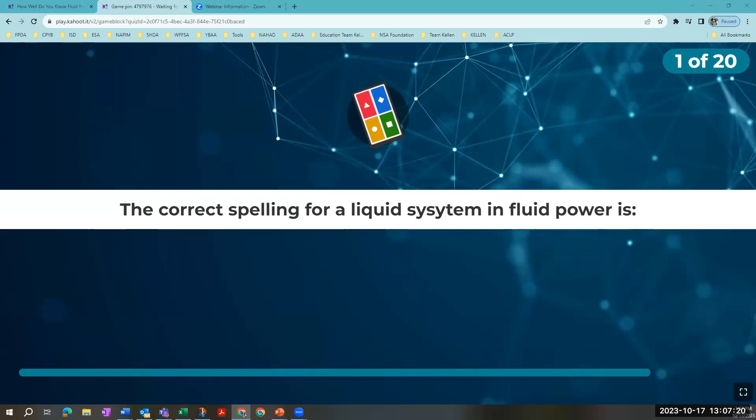Dan, you can feel free to read the question or they can read it themselves, but we've got about 15 seconds left. So yeah, all of these spellings, and probably 2 or 3 more, are the spellings that we see for this word, and it never ceases to amaze me how we still find new spellings on occasion.

All right, so hydraulics is spelled with an A-U and not a W. If it is spelled with an O, that is water power, by the way, but I didn't put that one on there because it would actually be 2 answers. It would be hydraulics and hydraulics with an O. So anyway, next question.

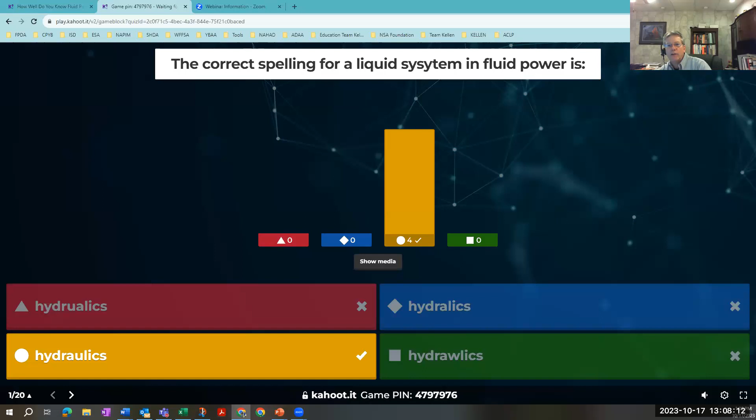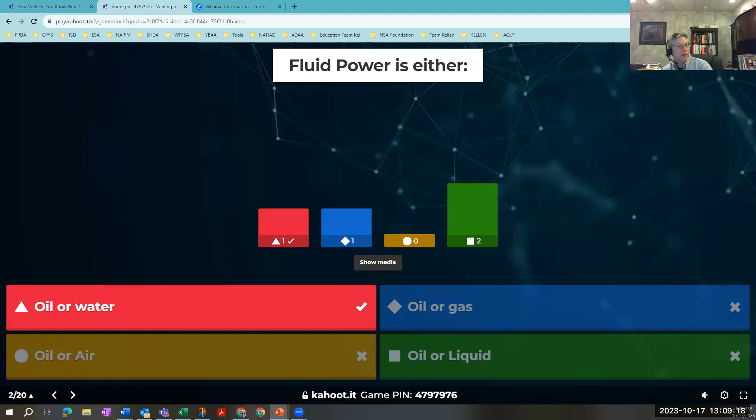Fluid power is either oil or water, oil or gas, oil or air, oil or liquid. There are 2 basic entities that go in the fluid power column. So the answer is that it is oil or gas. Water is a liquid, oil is a liquid, fluid, and liquids are fluid, and a gas is a fluid. So that was a little bit tricky, but understand fluid power includes hydraulics and pneumatics.

Hydraulic pressure in the United States is in GPM, takes into consideration that we are north of the equator, is multiplied by 14.7 due to atmospheric pressure, or is measured in PSI?

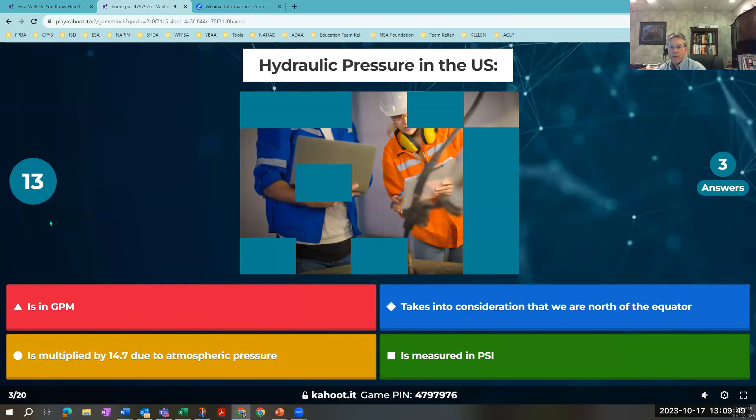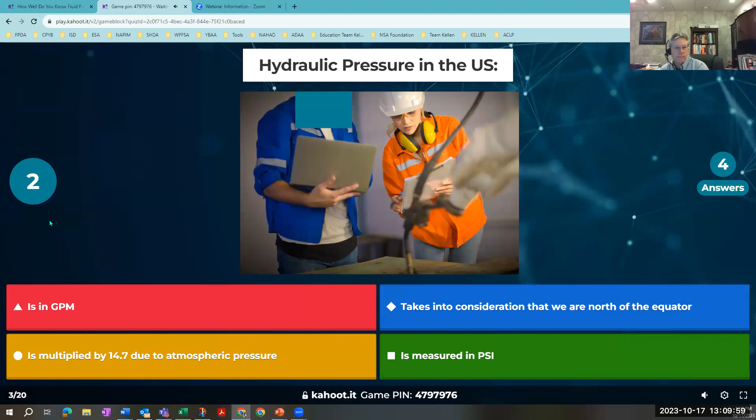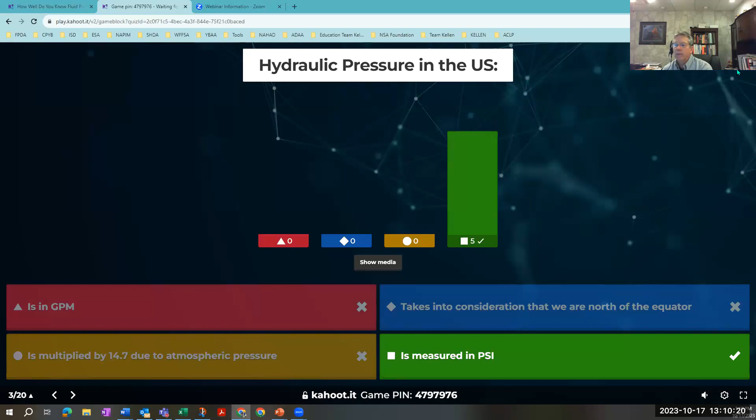Ah, look at that, everybody's got it. So that is correct, GPM is a measure of flow. PSI is pounds per square inch, the amount of pressure that is against 1 square inch of surface area. And it is not 14.7, which could be in a later question. Next.

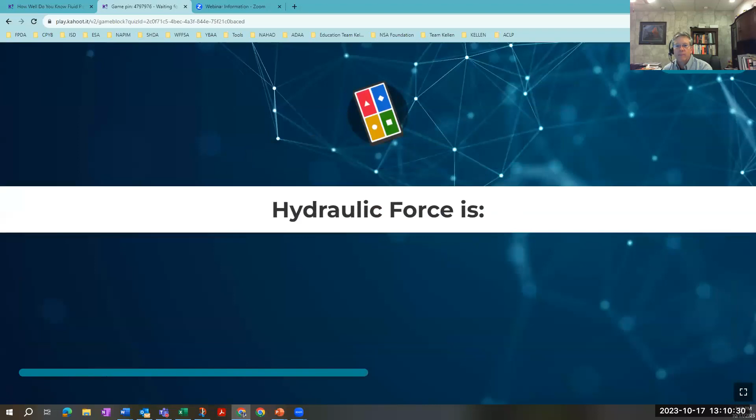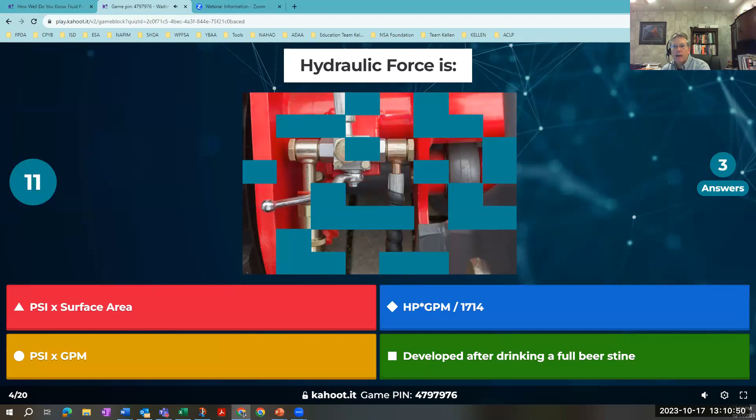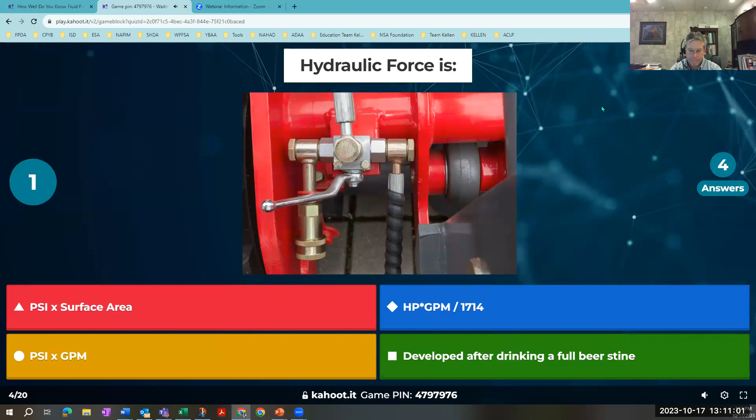Look at Jerry going to the top. Hydraulic force is PSI times surface area, HP which is horsepower times GPM divided by 1714, PSI times GPM, or developed after drinking a full beer stein. PSI times surface area would be the answer to that. That is pounds per square inch multiplied by the square inches that pressure is acting on. That gives us our force. Force is equal to PSI times area. Next.

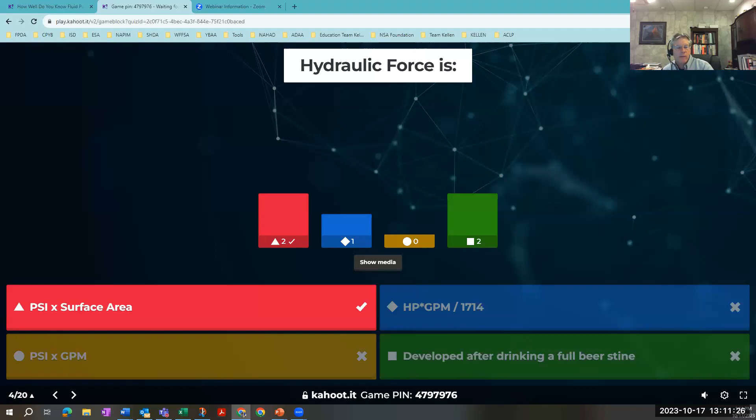Pascal's law, which is a big deal for fluid power, says that crap flows downhill, pressure is inverse to horsepower, pressure is 90 degrees to all surfaces of a container, or both B and C.

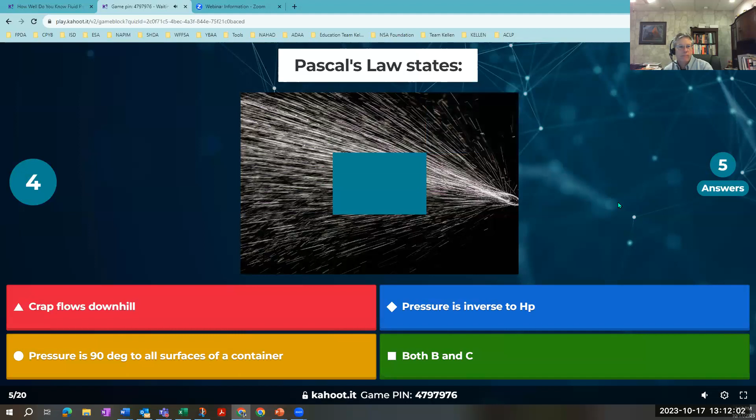Pressure is 90 degrees to all surfaces of a container. If that container has a static condition and does not have any dynamic flow in it, the pressure will be equal and at 90 degrees to all surfaces. I don't know if Pascal was a plumber or not, so I don't know if he invented the idea that stuff flows downhill, or whether that was somebody else.

Next. Oh, look at that, the lead has changed. I guess I've got to play a little bit if I even want to get on the board, huh?

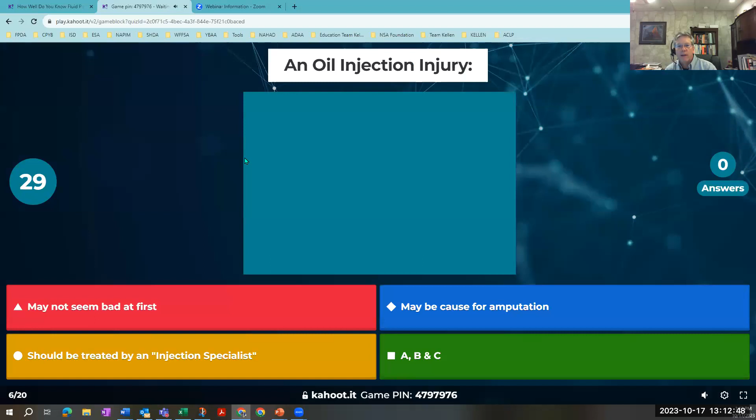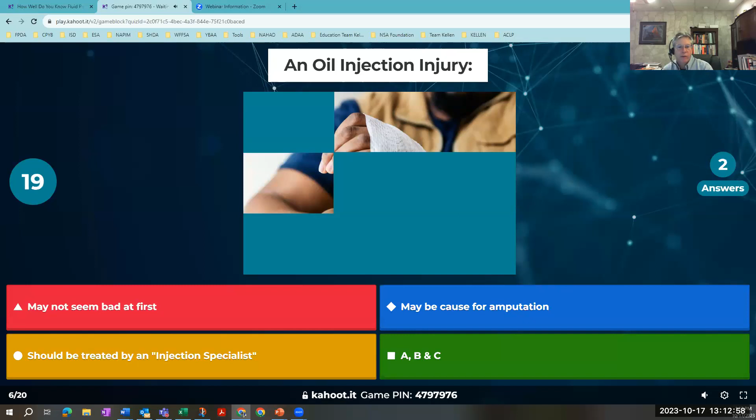Okay, a safety question here. An oil injection injury may not seem bad at first, may be cause for amputation, should be treated by an injection specialist, or all of the above.

Dan, you should pick your favorite color since you know all the answers. Boy, I wish I had purple on there. Actually, green. Ah, too late, I already missed it.

So the answer would be all of those. Oil injection injuries should be taken very seriously. It may just look like a pinhole prick, but most likely you'll also see some swelling in that area from the oil that went in. You can get an injury like this from grease or paint — never rub your finger against a paint sprayer to see if it's clogged. Any time you put your skin up against a pressure nozzle of more than about 100 PSI, you are risking injecting something into your body. Even high pressure compressed air and pressure washers fall into this category.

Whenever you get oil or some type of petroleum-based product injected under your skin, it begins to eat your flesh, and sometimes it needs to be amputated, but most of the time they'll at least fillet you open and let the oil get out of your body instead of letting it work its way up through your finger, hand, and arm. In one class, as I was teaching about that, a guy raised his hand, and he was missing a finger on that hand — he had lost it due to an injection injury. So these injuries are to be taken seriously, and you've got to go to a specialist who understands that.

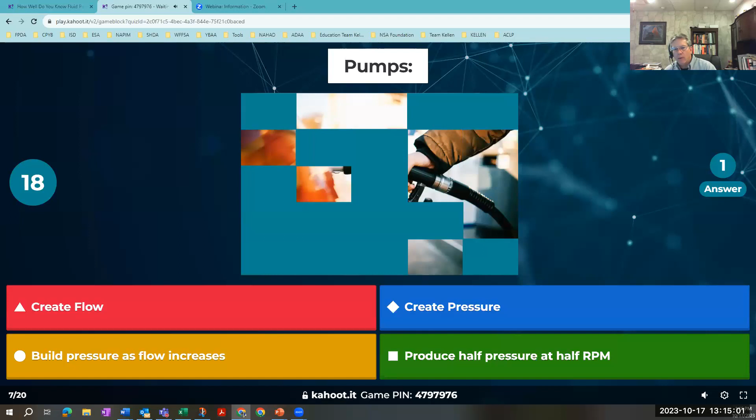Next question. Pumps: do they either create flow, or create pressure, or build pressure as the flow increases, or produce half the pressure at half the RPM? Well, what do pumps do?

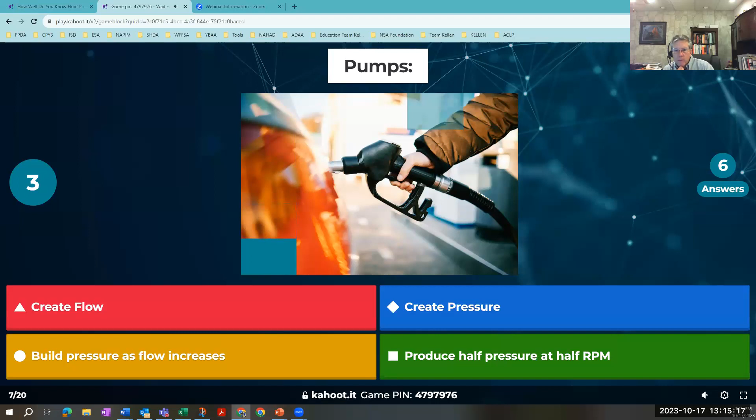Pumps create flow. Pressure is built whenever flow encounters a restriction and starts to build back pressure. A pump is always going to be rated at a certain gallon per minute or liter per minute rating, and then it will also have an upper pressure rating. So the pump produces the flow, and it's up to your system to create the pressure on that pump, and the pump is rated to be able to withstand that pressure rating. So that was good. Next question.

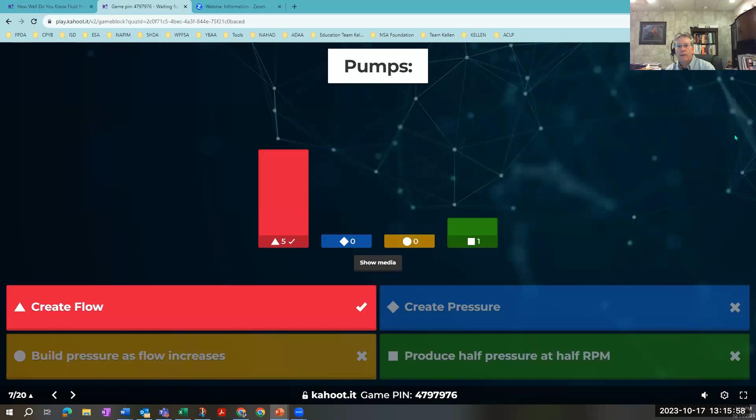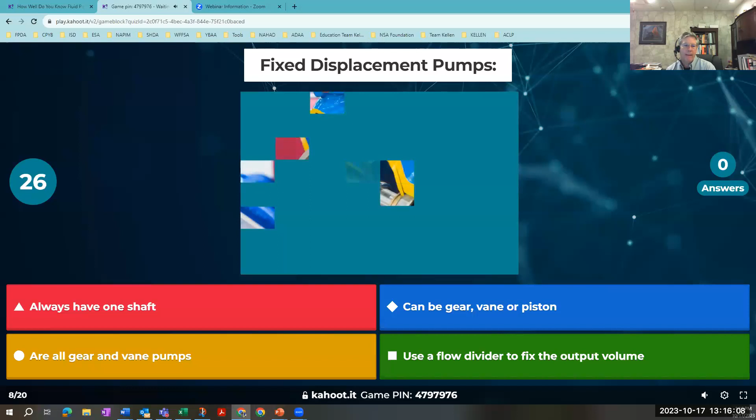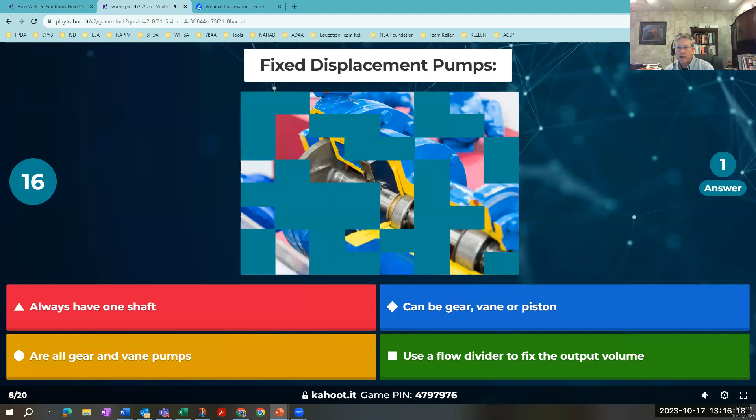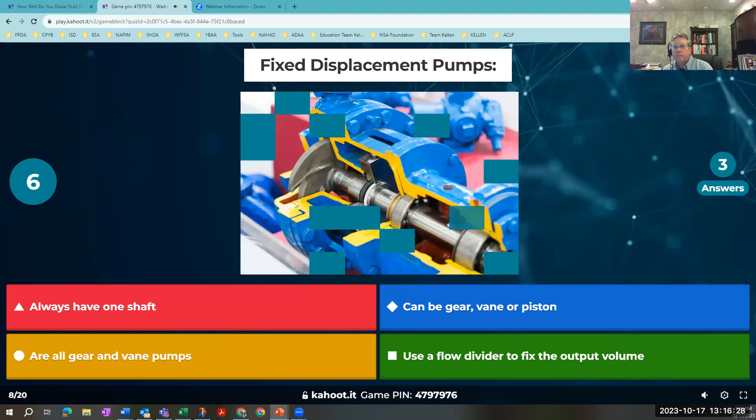So that is correct, except for the two people who said 'all gear and vane pumps,' because vane pumps can have a variable volume design with a pressure compensator on it. The way they work is the ring actually gets pushed to be centered over the rotor, so there's equal volume on both sides of the gap between the rotor and the ring. A common manufacturer for variable volume vane pumps is Continental. Next.

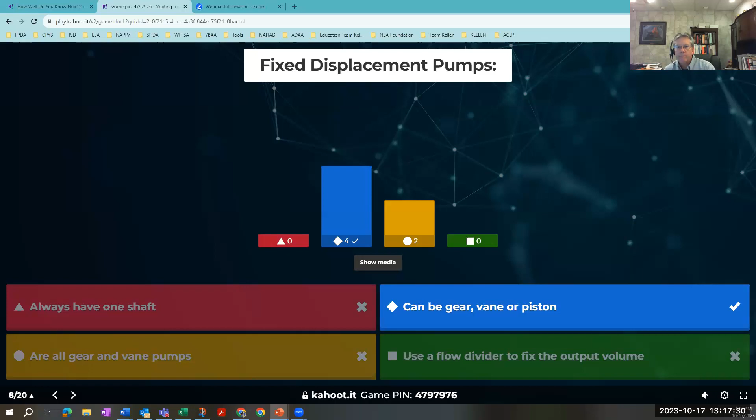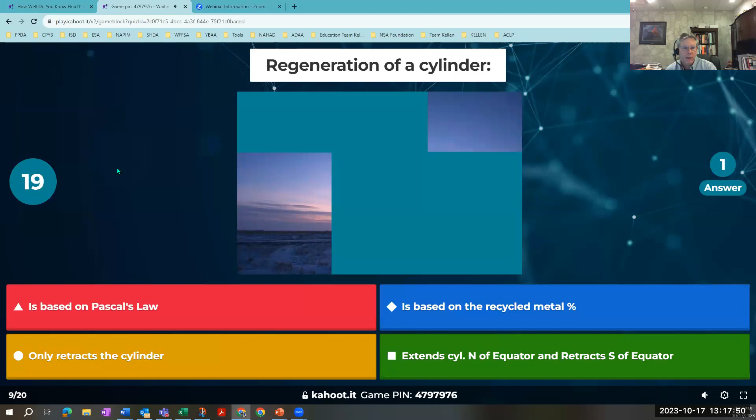Regeneration of a cylinder, often referred to as regen, is based on Pascal's law, is based on the recycled metal percentage in that cylinder, only retracts the cylinder, or regen extends the cylinder north of the equator and retracts south of the equator.

The answer is that it's based on Pascal's law, because pressure is equal against all surfaces in a closed container. Whenever you're doing regen in a cylinder, you're basically opening up the back end of the cylinder to the rod end of the cylinder, putting equal pressure on both sides, which then creates a differential force based on the surface area of the piston — the back of the piston versus the front, which is like a donut shape, because the rod takes away some of that area.

The cylinder will extend if you connect the extension and retraction ports together, because the pressure is going to basically be equal within all ports, but the force is not equal, because the surface area is not the same — the rod takes up some surface area on the rod end of the piston. So regen is a pretty cool thing, and many systems will use that to conserve energy. Next.

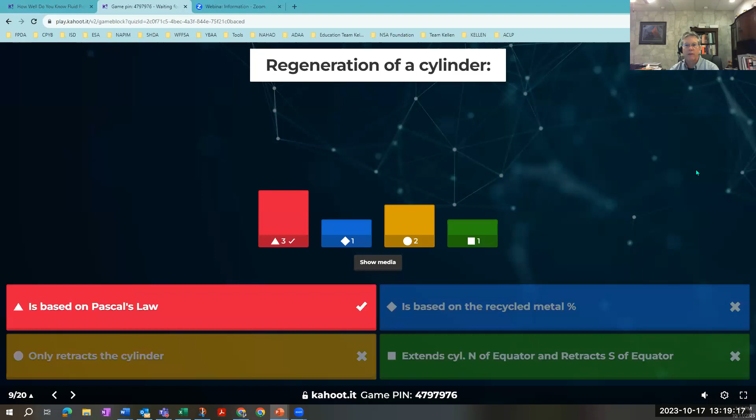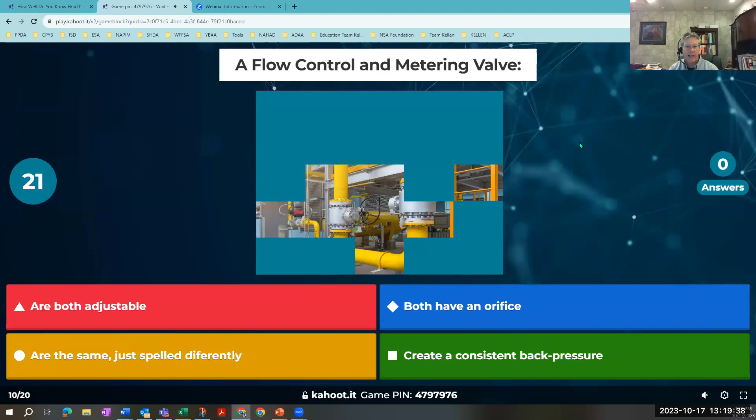A flow control and a metering valve: are both adjustable, both have an orifice, are they the same just spelled differently, or do they create a consistent back pressure?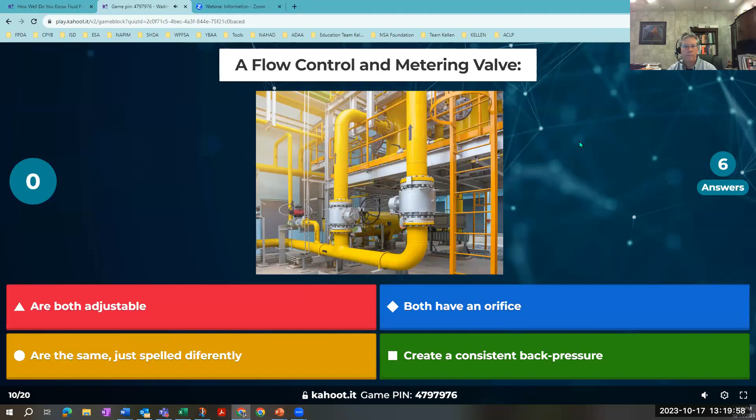Realistically, the difference between what we call a flow control and a metering valve is that a flow control will have a bypass check, so it only meters in one direction. So they aren't the same device. They aren't always adjustable—there are many that have adjustability, but you can get a flow control or a metering valve that's just set by the factory. The answer is that they do both have an orifice, and that orifice is what meters the flow, going on a metering valve both directions, or on a flow control in only one direction.

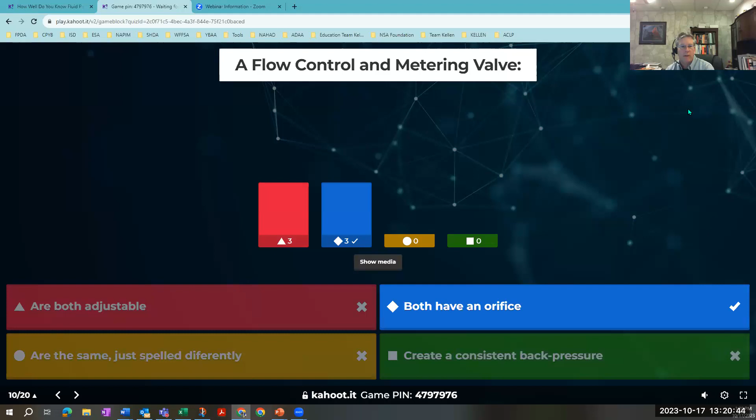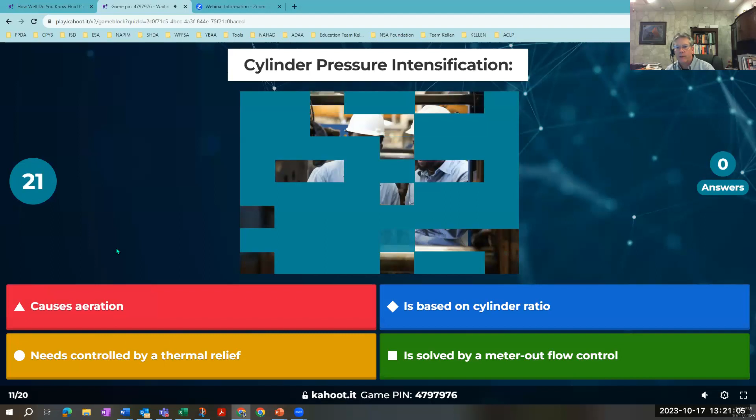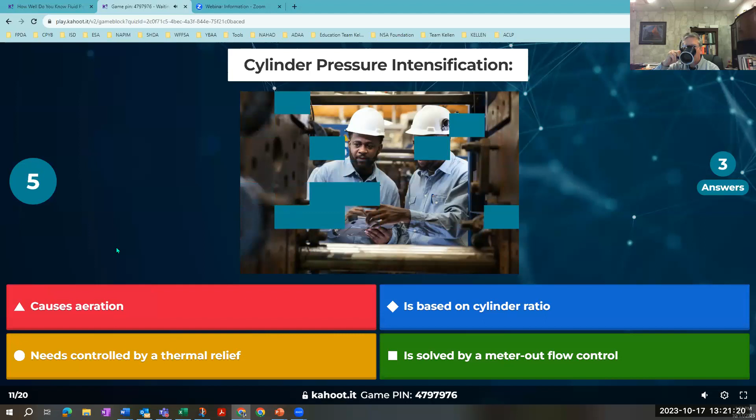Cylinder pressure intensification causes aeration, is based on the cylinder ratio, needs controlled by a thermal relief, is solved by a meter-out flow control. So the answer is going to be: it is based on the cylinder ratio.

The cylinder ratio is the surface area of the blind end of the piston versus the size of the rod. A lot of times we have a 2-to-1 ratio, where the blind end of the cylinder has an area twice the size of the rod. If you go to a 3-to-1 ratio, you have a bigger rod. The annular area, which is the area of the piston outside of the rod on the rod end, would be 1/3 of the blind end piston area on a 3-to-1.

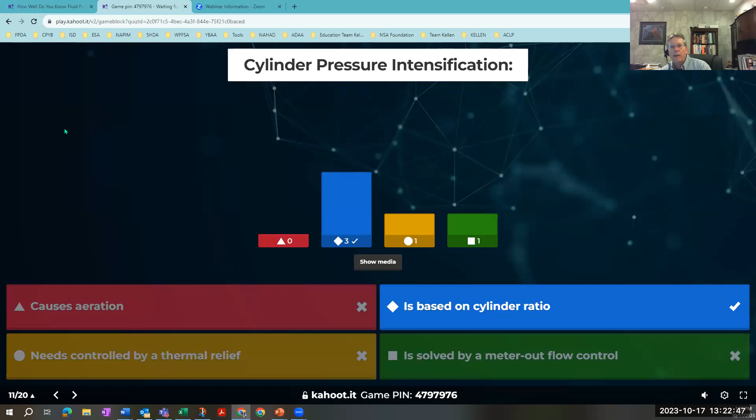You can get intensification by putting pressure in the back of a cylinder and restricting the flow coming out the rod end. On a 2-to-1, you can get double the pressure in the front compared to what you're putting in the back. On a 3-to-1 cylinder, if you put in 2,000 PSI in the blind end, you could get 6,000 PSI on the rod end. So that is intensification based on the cylinder ratio.

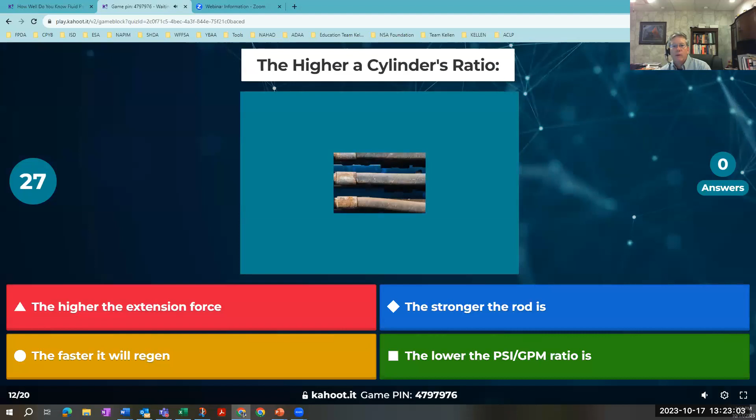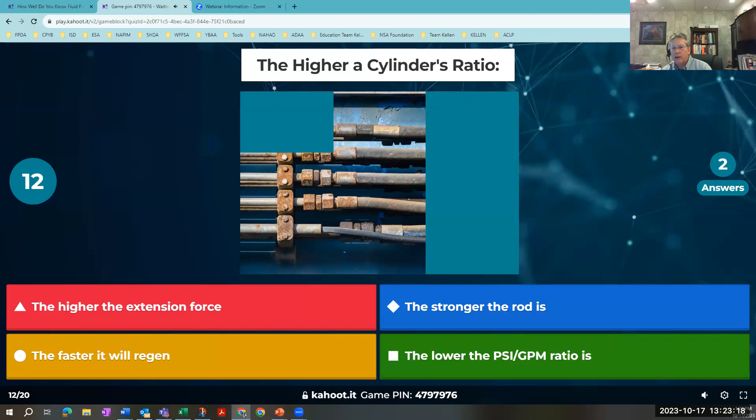This one's kind of similar to the other question. The higher a cylinder's ratio, the higher the extension force, the stronger the rod is, the faster it will regen, or the lower the PSI per GPM ratio is.

We just kind of answered that on the last one. Whenever I said like a 3-to-1 ratio, we'll have a larger rod. So the higher the ratio means that the rod is getting stronger. A 3-to-1 ratio would be a larger rod than a 2-to-1 ratio, that ratio being basically the blind end of the piston area to the annular area around the rod. It does not give you a higher extension force. It would actually, if the ratio goes up, the regen will be slower because there's less oil around that rod to go back into the blind end. And the lower PSI per gallon per minute ratio is basically a made up term. So there you go—stronger the rod is.

Wow, I think Vanna had all the answers.

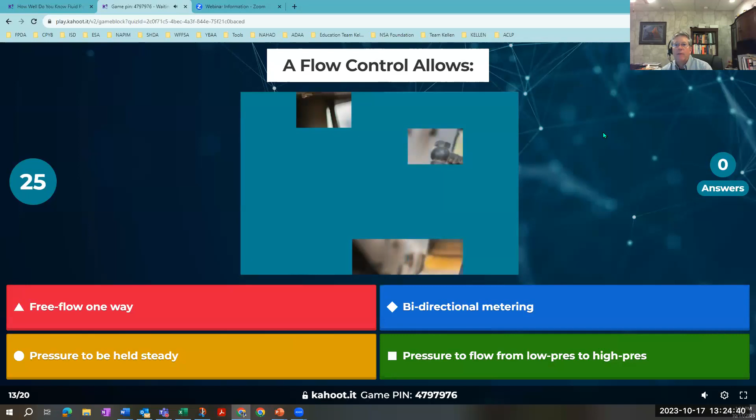A flow control allows free flow one way, bidirectional metering, pressure to be held steady, or pressure to flow from low pressure to high pressure.

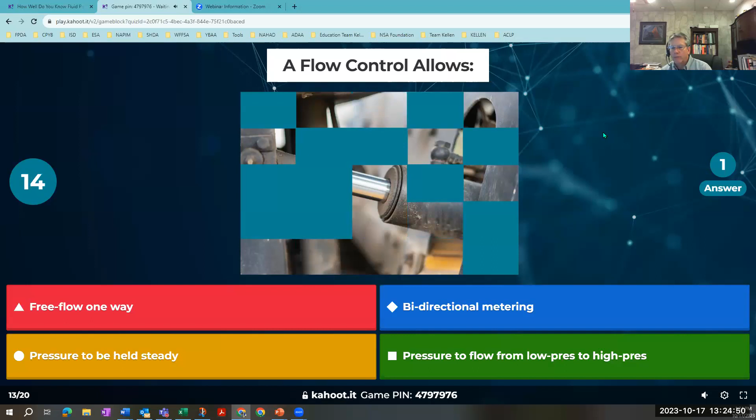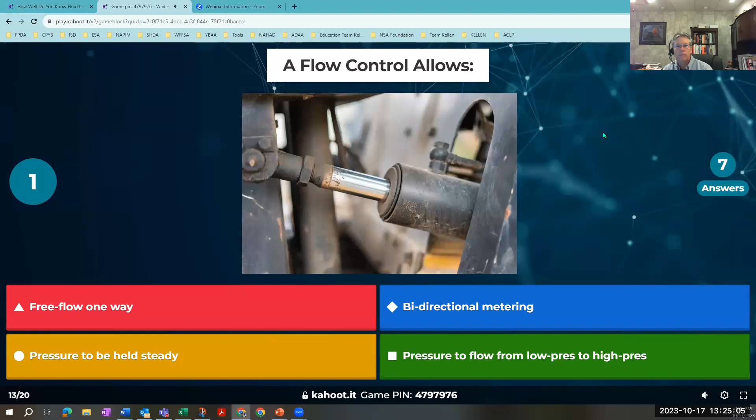So yes, I basically just answered that back on the question about the difference between metering valves and flow controls. A flow control will allow free flow in one direction—it's a metering valve with a bypass check valve. The bidirectional metering would be a metering valve that's going to meter in both directions. The other two answers had pressure in them, and a flow control is a flow device, not a pressure device. So even though it can affect pressure, it's not going to hold it steady, and pressure never flows from low pressure to high pressure—it's always going from a high pressure to a low pressure.

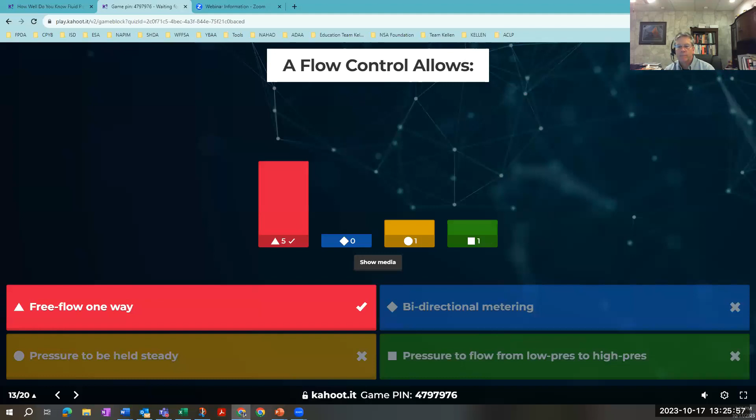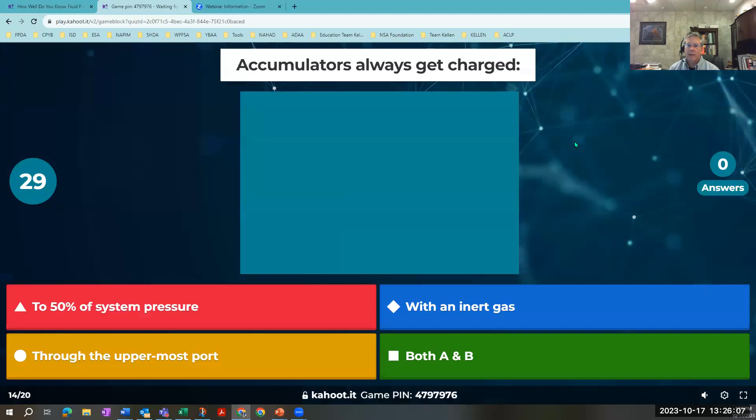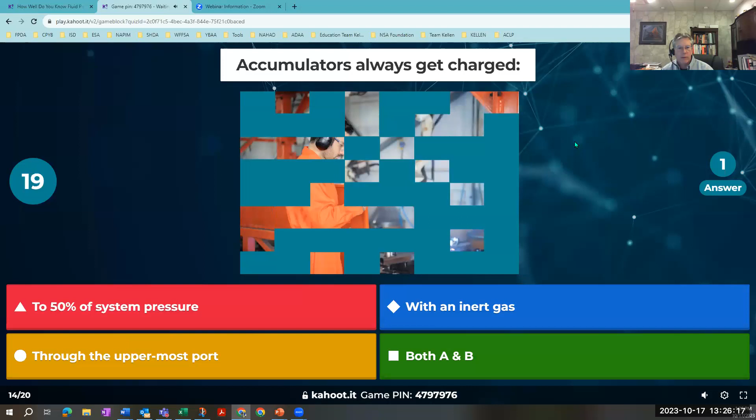Accumulators always get charged to 50% of the system pressure with an inert gas through the uppermost port, or both A and B.

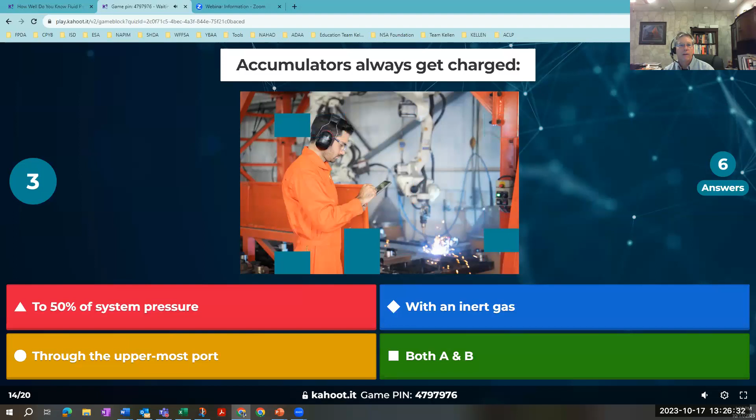The answer is going to be an inert gas. The reason it's not A and B is that there are times you'll put more pre-charge pressure in an accumulator if you're looking to take a surge out of the working port, or something like that. A lot of times, if you're using oil as an emergency backup supply of fluid, you might charge to 50% of system pressure, but that's not always true across every application. You need to use an inert gas, never compressed air or any other gas that has combustibility or will support combustion.

There are cases where people have used compressed air, and whatever that gas is, once compressed, there's some oil vapor in there as well as an atmosphere that will support combustion. They can diesel and they can explode. So an inert gas will prevent that and make working with accumulators much safer.

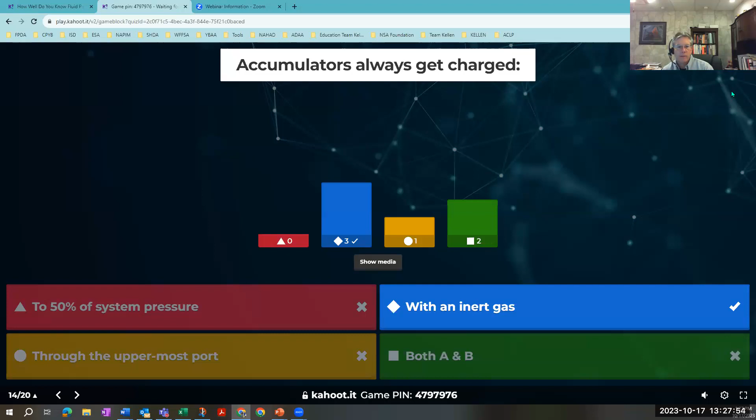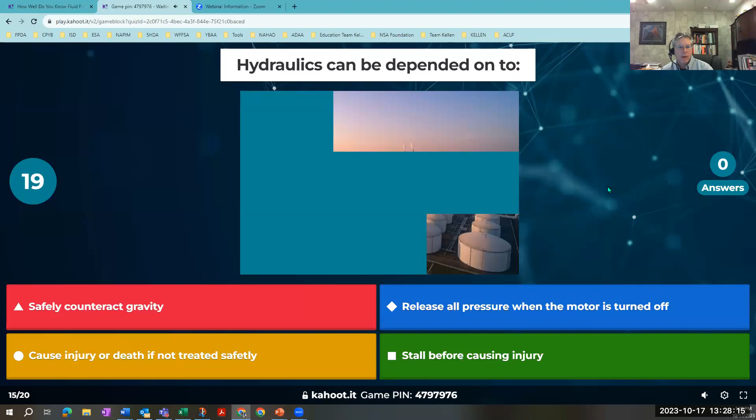Hydraulics can be depended on to safely counteract gravity, release all pressure when the motor or engine is turned off, cause injury or death if not treated safely, or stall before causing injury.

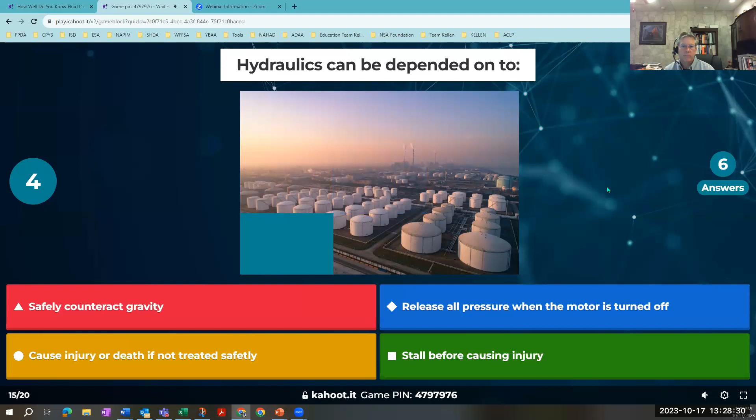Correct. As a matter of fact, thinking that hydraulics will safely counteract gravity can lead to death. So you've got to respect the hydraulics. You should never trust the hydraulics to be holding a load. Hydraulics do fail. You should always mechanically support that load.

Like for instance, when you're using a jack under a vehicle, that's a hydraulic jack. You're going to use jack stands, so you're mechanically supporting that load before you actually crawl underneath the vehicle.

I unfortunately years ago checked out a small dump truck where a guy raised the bed up. He was wiring up his exhaust muffler because he found it easier to just lean over the frame of the truck while doing that. Unfortunately, the bed of the truck drifted down on him and killed him, and I went there to give a report on what would have happened.

Whenever I raised the truck up and put the safety leg in, like he should have done, there was his chewing gum still with teeth marks on the muffler. It's pretty sad to think this guy had no clue how unsafe what he was doing was.

So you've got to think. I often say, think 3 seconds ahead whenever you're working with things, because we don't have a 3-second rewind button. But if we can just think 3 seconds ahead, we would think, hey, I'm not going to bend in here. I'm going to walk around to the other side and put that safety leg down.

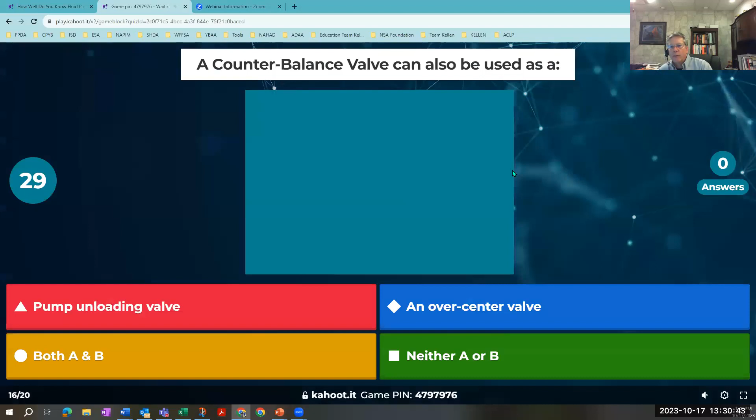Counterbalance valve can also be used as a pump unloading valve, an over center valve, both A and B, or neither A or B.

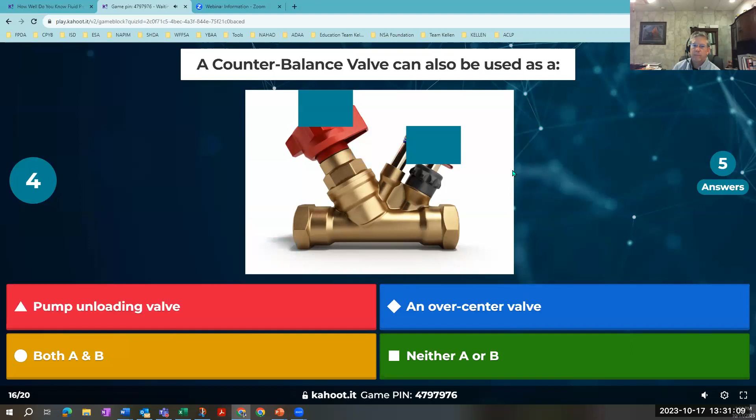This is a pretty tricky question. The answer is going to be a pump unloading valve. A counterbalance valve is a load holding valve, but it's also called a variety of terms based on where it is in a circuit. So it can be a counterbalance valve, generally whenever it's on the blind end of a cylinder holding a load up.

If that load is going to go over center, like on bucket trucks, sometimes on an aerial man lift, whenever the boom goes over center, to keep that cylinder from running away, we use a counterbalance valve, and we often term that an over center valve. We will also use them on motors and call those brake valves.

And since it's pilot operated, we can use a counterbalance valve to unload a pump, especially in a high-low pump circuit, so that the high flow pump gets unloaded with zero pressure against it, because it's being piloted from the high pressure side, which would have the low volume pump. So yeah, counterbalance valve is a load holding valve.

The other valve in the category of load holding would be a pilot operated check. I don't think there's a question in here that keeps me from saying that, but a PO check valve is more of a digital device, either open or closed, and a counterbalance valve is more of an analog valve, which allows feathering to keep the load from running away.

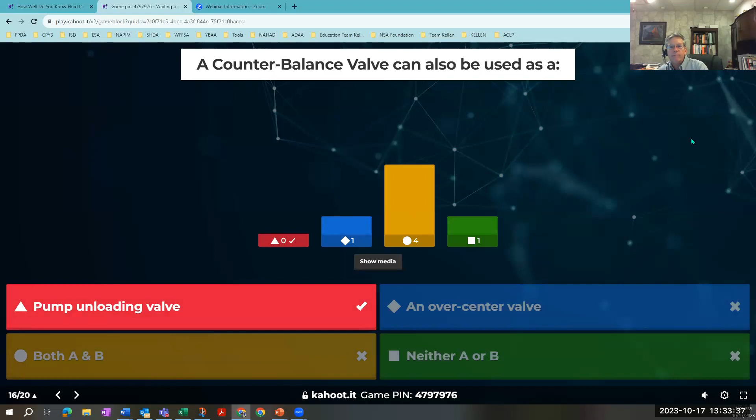Because I'm not sure if I messed that up. So yeah, I don't know that we can correct that, but I really wasn't watching the answers here, but the answer would be the number 4 there, where 4 people got it right. It is both pump unloading and over center. So if it's that close of a score at the end here, we'll have to look at that question. Sorry, I don't know if I messed that up or not. I probably did.

Replacing a gear pump with a variable volume pump is a great idea, is too expensive, requires a pressure filter, or requires back pressure for proper operation.

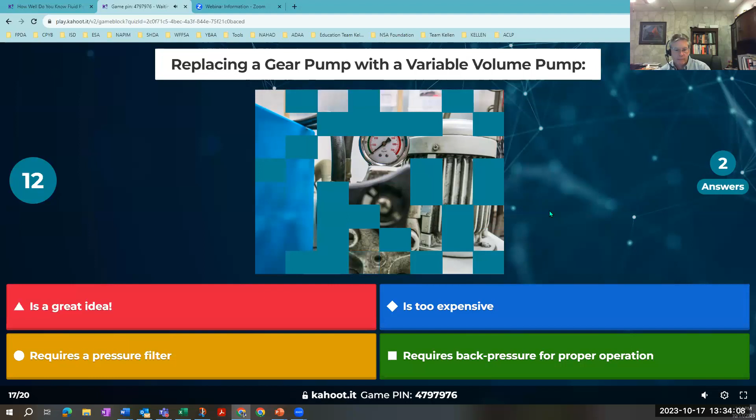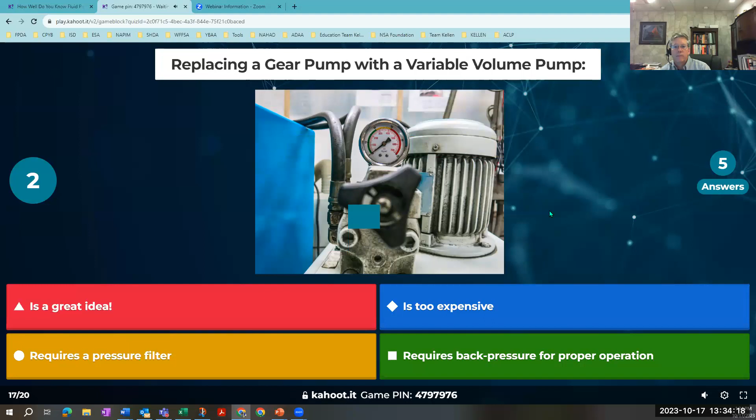Okay, of interest, I realize I didn't frame the question quite right, and this is the first time I've done this. The question should be replacing a gear pump with a variable volume piston pump. If you use a variable volume piston pump, you need to have a certain amount of back pressure, maybe 250 to 300 psi minimum pressure.

That helps lubricate the shoes on the end of the pistons. The pistons have a hole drilled down through them, as do the shoes, and that allows the higher pressure oil to get down there and lubricate between the shoes and the swash plate. So you can't just use a variable volume piston pump and let it go back to tank like you would with a gear pump.

However, it can be a great idea, but you would also need to change the valve, because a gear pump is normally an open center valve going back to tank. You would want to put in a closed center valve so that you're not flowing right back to tank, so you do get that back pressure.

They don't necessarily require a pressure filter, but I do say pressure filters are good on any type of system, whether it's a gear pump, which actually pushes some particles into the system. It's good to keep contaminants coming out of the pump from going downstream into valves. But back pressure is what you need on a variable volume piston pump.

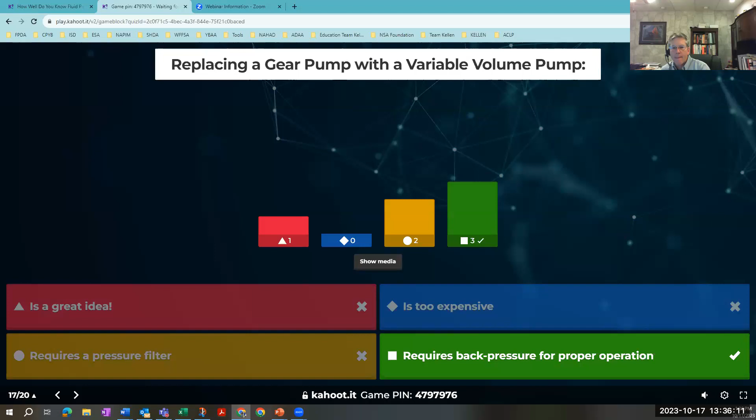Next. Jerry's back up there. Vanna doesn't count.

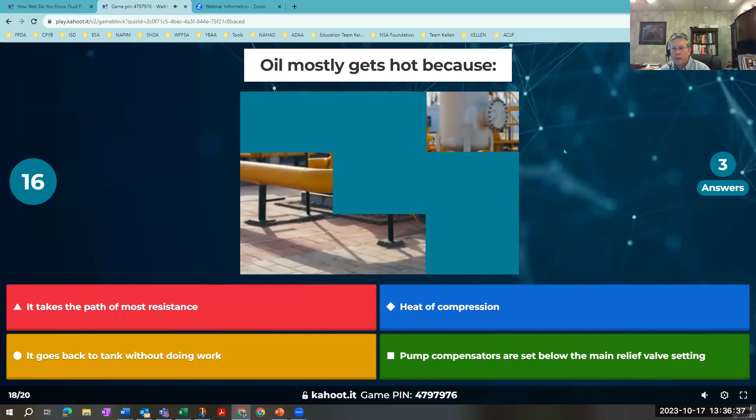Oil mostly gets hot because it takes the path of most resistance because of the heat of compression, or because it goes back to the tank without doing work, or because pump compensators are set below the main relief valve setting.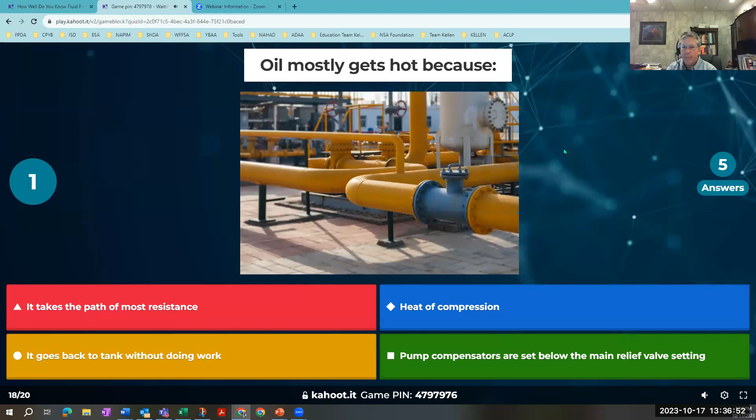Oil will take the path of least resistance, not most resistance. So that was kind of a trick question, or trick answer, put it that way. Heat of compression has nothing to do with what's really going on.

When oil is built to a pressure, there is a certain amount of energy put into that fluid. If that fluid does work, that's how it dissipates that energy. But if the oil goes back to tank without doing any work, it has to dissipate the energy that was put into it to take it to that certain pressure. The energy it gives off by going from high pressure to low pressure without doing work is in the form of heat energy.

On the last answer, where it says pump compensators are set, if they were set above the main relief setting, that would be a huge heat generator. So when changing a piston pump out, always make sure the relief valve is set maybe close to 10% higher than what the pump compensator is set at.

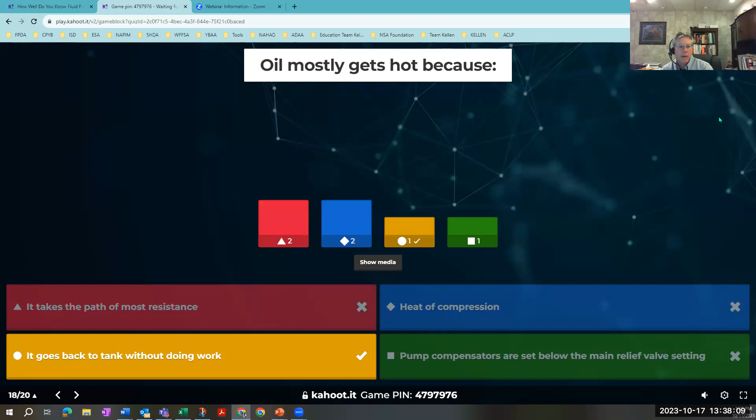So the correct answer is it goes back to tank without doing work. Somebody got that one.

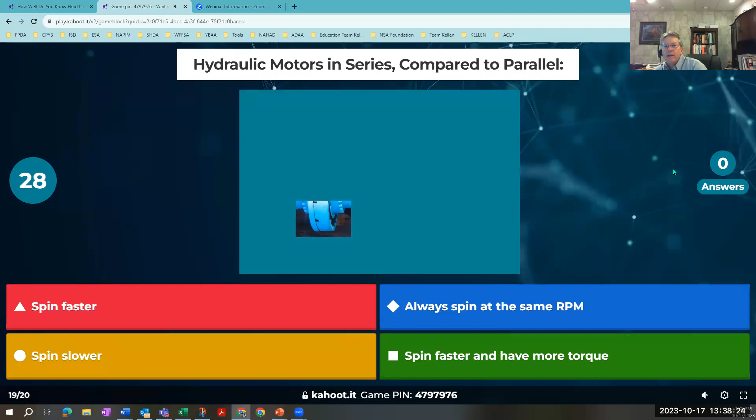Looks like the order stayed about the same. Hydraulic motors in series compared to parallel: do they spin faster, always spin at the same RPM, spin slower, or spin faster and have more torque?

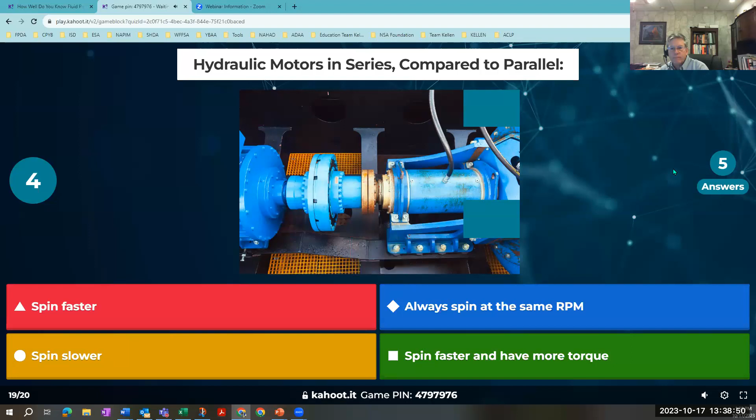Okay, again we put a little trick stuff in here. Whenever they are in series, that means the oil is flowing through one motor into the other motor. If they're in parallel, they are going to split whatever flow it is half and half. Half of the flow goes through one, half the flow goes through the other. Therefore, they would spin slower.

So they definitely spin faster. They don't always spin at the same RPM because we don't know that the cubic inch per revolution of the motors is the same as each other, so it does say spin the same RPM if you're going from series to parallel, or compared to parallel, so you'd be going from parallel to series. They wouldn't be spinning at the same RPM. They would just be spinning faster, and they do not have more torque.

The torque is actually lowered because the oil isn't going back to tank at 0 PSI. So in series, one motor basically bogs the other motor down. You don't get as much torque. So the answer is spin faster, somebody got it.

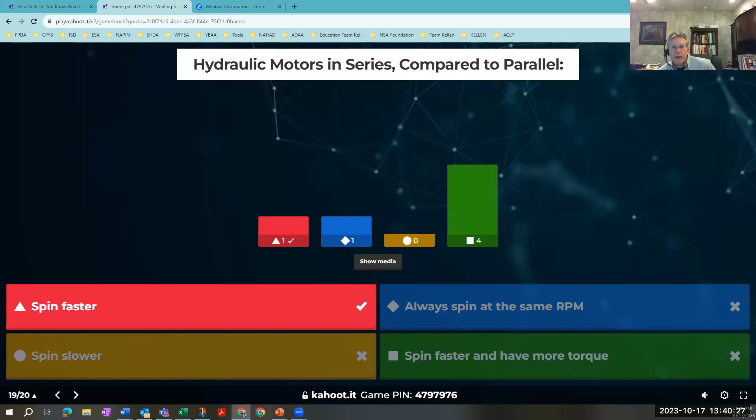Okay, next. Tony's moving up.

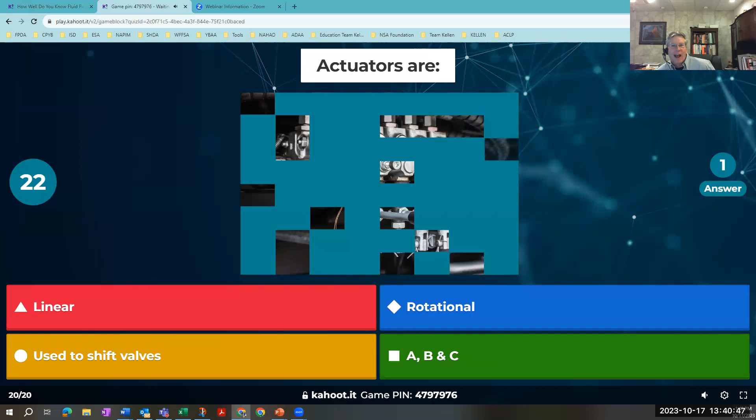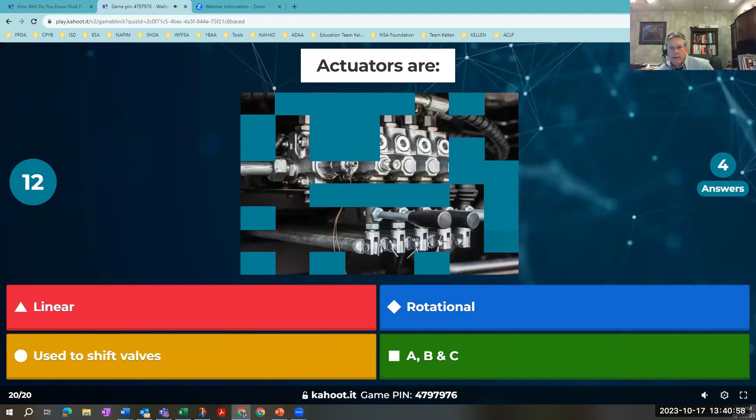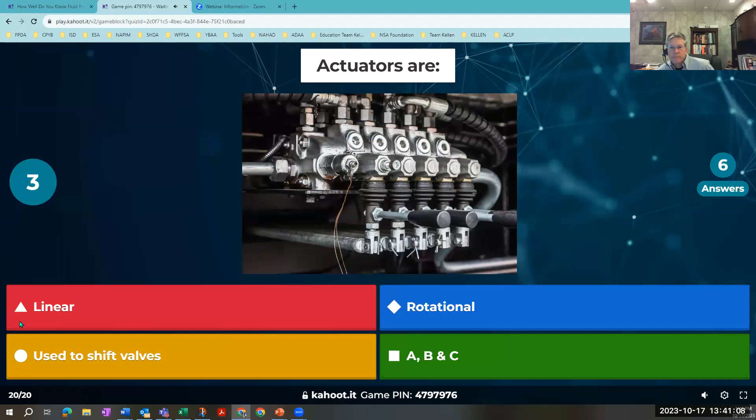The answer would be they are all A, B, and C. Actuators are linear. We can have linear actuators, which are basically cylinders in the hydraulic world, but you can also have electrical linear actuators, like a motor and a ball screw. You can have rotational actuators, which could be a motor or a partial rotational actuator that goes less than 360 degrees. And you can have actuators to shift valves, like solenoids or levers, even spring centered ones. So there's a variety of ways that you can actuate valves.

The answer would be A, B, and C. Looks like most people got that.

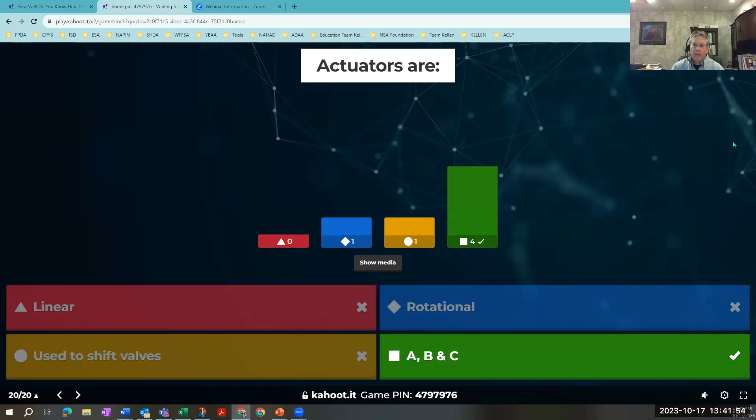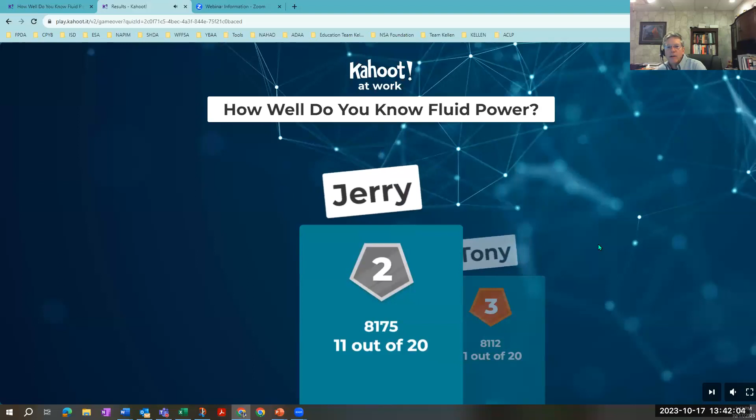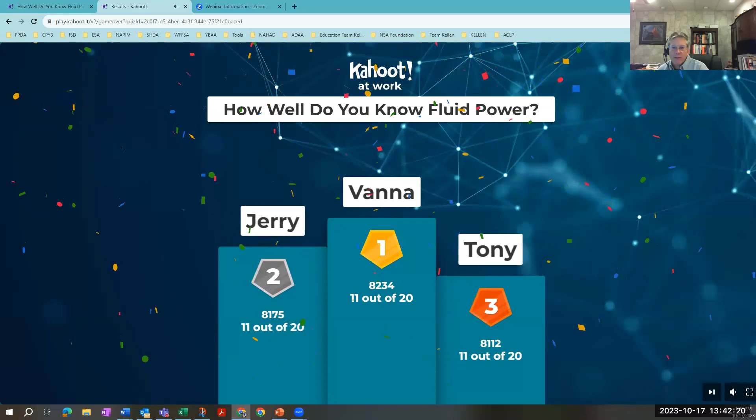So now I guess we're tallying. Third place, we got Tony, Jerry in second. And I think Vanna had, I don't know whether she had access to the answer sheet at one point, whether she was using it today or not. I would have to say not, if she only got 11 out of 20.

Why would there be different scores? What's the deal with where it says 11 out of 20 but different scores? I am not sure about that. Kind of looks like if you've got 11 out of 20 with 3 people, looks like we've got a 3-way tie. It's how fast you answer. There you go, Joanne, thank you. Very good, okay, the quickest, that's the good news. Who is Tony, by the way?